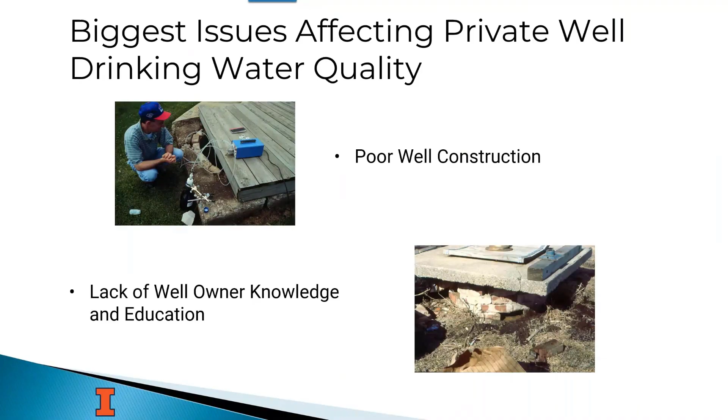Now, of course, this always comes with challenges. The definition of a private well can vary across states. The agency overseeing them and their processes, they all differ. Illinois started requiring well logs around 1978, but New York State didn't start doing that until 2000. So they only have 10 to 15% of all their logs because it simply wasn't required for people to turn those logs in. So while we go back to 1934 and earlier, New York didn't start until 2000. So that's a big difference between the two states.

Then we look at New Jersey. New Jersey has had the Private Well Testing Act. So for about 20 years, they've required that wells be tested during a property transfer. They don't share the individual results with anyone but the buyer and sellers, but they do use a 2 by 2 grid to group homes, and this helps protect home values by not singling out which home had high levels of a contaminant.

Then you have states like Pennsylvania, where there is no construction code, and a drilling license doesn't require competency. You also have the state budgets limit what states can and cannot do. Some states provide a large budget to do private well education and outreach, while others don't have any kind of budget at all for it. And so, if you don't have those resources, how can you be proactive to research the water quality in private wells? And of course, when you get down to the county level, there's always disparities between those that can afford outreach and support and those who cannot.

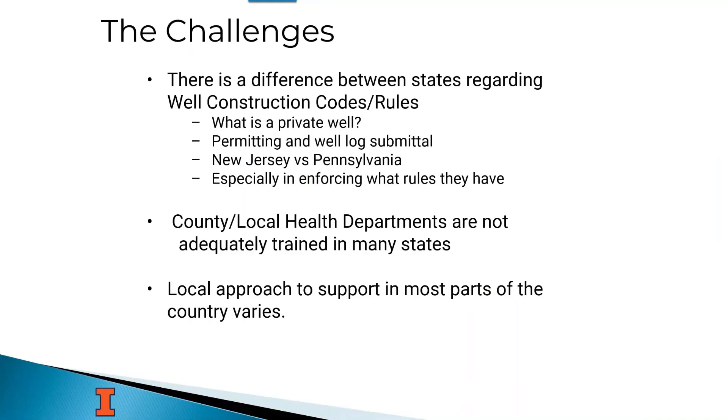I will mention Pennsylvania. They do have a license for well drillers, but if you look at their website, it does say a license does not imply that a driller has knowledge of proper drilling or well construction practice. The Pennsylvania Geological Survey does not endorse drillers based on this certification. So you do have to take that into consideration if you're going to get a well drilled in Pennsylvania.

And so some places are passing ordinances to require the National Ground Water Association certification, which is a voluntary process, in order to kind of beef up what a well driller knows to make a homeowner a little more confident in the well driller that they choose. There are only two states, Alaska and Pennsylvania, that do not have a well code. All the other states do.

But then in Massachusetts, they have 351 local health districts, which can all set their own rules. And Illinois is 5 times the size of Massachusetts, but we only have 97 certified health departments, and they all follow guidance given to them from the Illinois Department of Public Health. So as you can see, depending on where you're at in the nation, it really varies on what governs well construction codes.

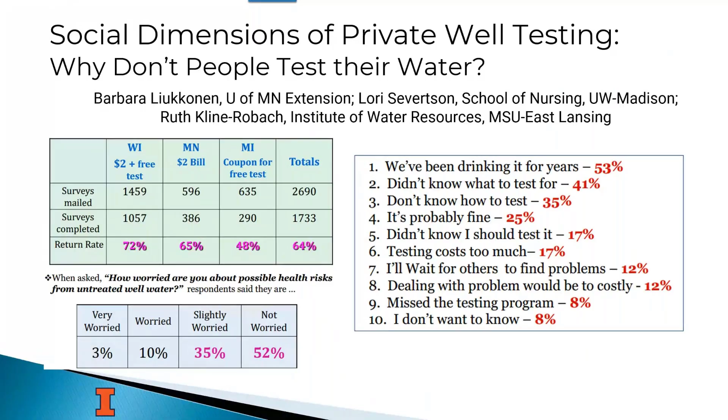And so whenever we look a little bit closer at this, we see that 35% don't know how to test. So I don't know how to do it, so I just don't do it. A quarter of them thought that, well, it's probably fine. What do I need to test for? It's going to be okay. And then one of the things that's becoming an even bigger issue is the testing costs. 17% thought that it was too much, and the prices have only gone up since this study was done.

And whenever we deal with people who are well owners and try to convince them to test their well, one of the biggest things people come back with is, we've been drinking this water for years. It's been fine, or my grandparents lived in this house and they both lived until their 90s, so there's nothing wrong with the water. It's probably fine. And then the last one, again, I don't want to know.

I know Steve worked with an individual where they were doing testing, and the guy said, you can do the testing, but don't let me know what the results are. And whenever they talked to the gentleman a little bit more, it turned out that in the state of Illinois, you have to sign off if you know something's wrong with your well before you can do a property transfer. And he wanted to honestly be able to sign off that he didn't know that anything was wrong with his well.

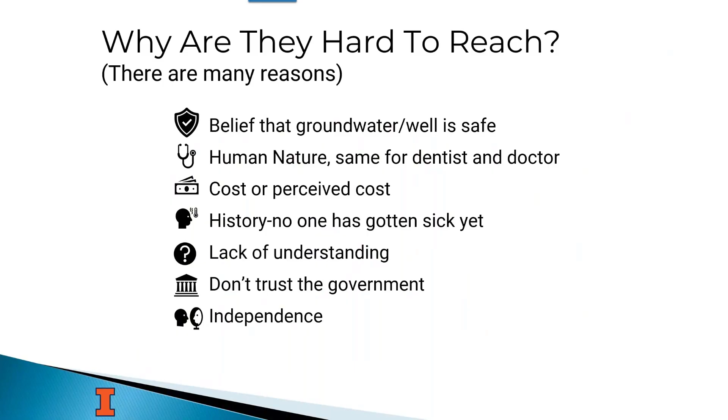Now we'll move on and talk a little bit more about the geology and the types of water wells. So whenever we have a water well, you have to get the well water from somewhere. And so typically it goes into an aquifer. But depending on what kind of aquifer you have available, that's what determines what type of well gets drilled on your property. So a dug and bored well are usually less than 50 feet and 3 feet in diameter.

Drilled and driven wells usually go into sand and gravel aquifers, and those are the ones that require a screen. Sand and gravel aquifers have a porosity of around 30%. So if you have 100 feet of sand, you'd have 30 feet of water. So they're very prolific and provide a lot of water for a homeowner. A drilled well can also be in bedrock, and bedrock wells rely on the cracks and fissures in the rock that allow the water to flow into the casing. That's why they're not cased all the way to the bottom like a sand and gravel well.

And then you may have two choices or three choices, multiple choices depending on where you live. Some of these aquifers lay on top of one another. So, here in Champaign, we actually have that very thing. We have the Glasford Aquifer and the Mahomet Aquifer on top of each other. But you can also go much deeper down and put a well in bedrock, but that's very expensive. The water quality is not that much better. So typically people stay in one of the top two, the Glasford or the Mahomet aquifers.

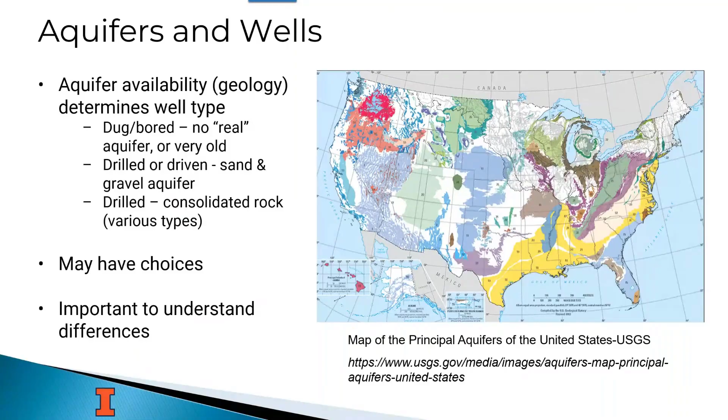They're not sealed at the edges, and so then the water seeps in from the water table and thin sand lenses, and that's how the water fills that. And so that's why you need that wide diameter, is you have to have enough volume to be able to store water as it trickles in to make sure that there's enough for the home to operate on.

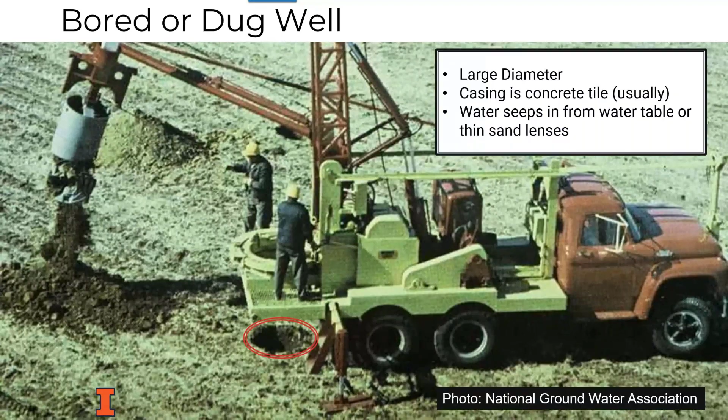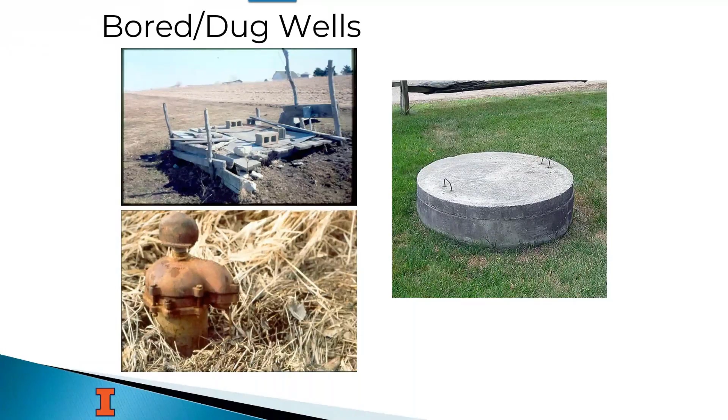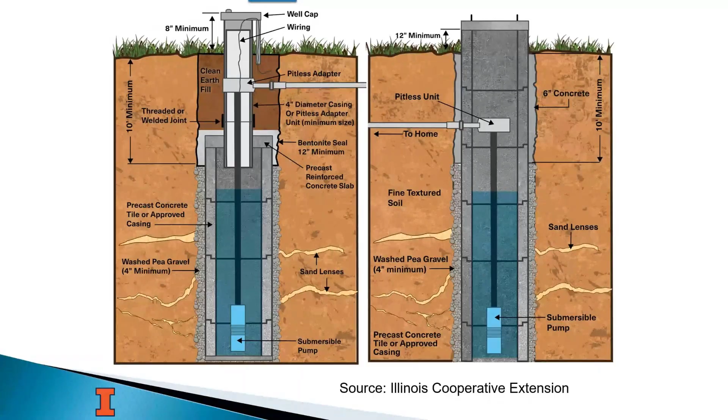Next up, we have our sand and gravel wells. A sand and gravel well will typically have a woven stainless steel screen that's pictured here on the right. And the slot size is determined by the size of the sand that the driller brings up. So in glaciated areas, the glaciers drop larger particles first, and then they drop smaller particles that fall out a little bit later. So as you drill down, you can see these stratification layers.

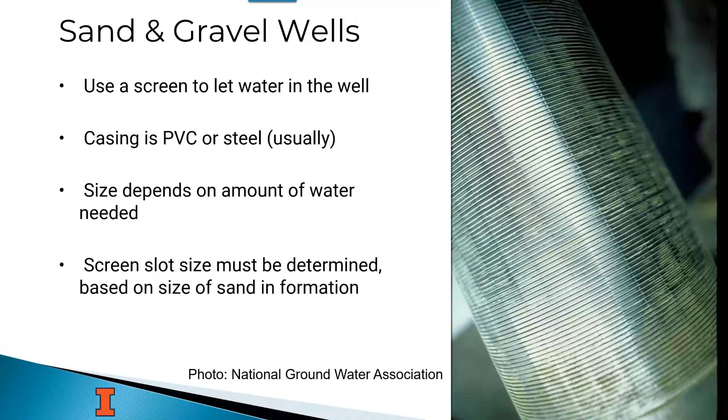So a driller, when they go down, they're going to be looking for that coarser material, so you have less likelihood of the pump sucking up that sand into the pump. So when we look at a sand and gravel well, we'll actually see that the casing goes all the way down to the bottom, except for the bottom 4 or 5 feet, which has that screen on it. And again, that screen is there to allow the water in, but keep the sand out.

So think of it just like your window screen, where it lets the air through, but it doesn't let the bugs through. And so that's why you have that screen all the way at the bottom. And then since it is cased all the way down, you do have that grout seal that goes down as far as the driller can get it. And so that way, the only place that water can enter the well is through that screen at the very bottom.

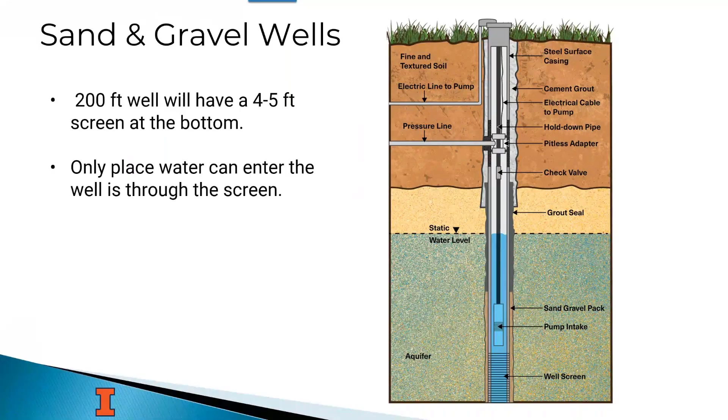Now, this is an example of an Illinois well log. And so we'll look at the bottom right-hand corner. We actually can see the geology layers. And so, as I explained earlier, whenever you do a sand and gravel well, you'll see that this driller went through a couple layers of sand before he came down to 290 to 295 feet. So that 5-foot screen was put into that sand and gravel that was a little coarser than the sand layer up above it. So this allows you to see exactly where the well was installed.

This is the same well log, it's just a different view of it, where, if you look at the very bottom left, you'll see the top of the screen was at 291 feet and the bottom of the screen was 295 feet. So this is just the same well log, just a different type of view.

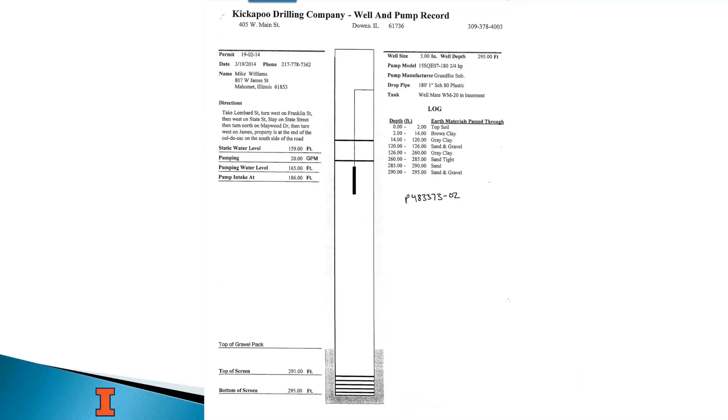So you can see exactly where that screen falls on a sand and gravel well. We also have bedrock wells. Now, these wells are a little bit different than your sand and gravel wells.

That casing only goes down 10 to 20 feet because the water comes in through the cracks and the fissures of the rock, and that's where your water is carried. So the rock itself doesn't necessarily hold water, so you have to use those cracks in the rocks, and that's where the water comes in. So you have to leave the casing open in order for it to catch as many cracks and crevices that it can to help keep the water in the well.

One thing to point out with bedrock wells is even though they can be very deep, it's those cracks that you have to worry about. It could be a crack that starts at the ground level and comes down and intersects your well 20, 30 feet down. And so you have no idea that it actually got its start from the surface. And so that can allow the influence of surface water into a bedrock well. So that is something to take into consideration if you're dealing with bedrock wells.

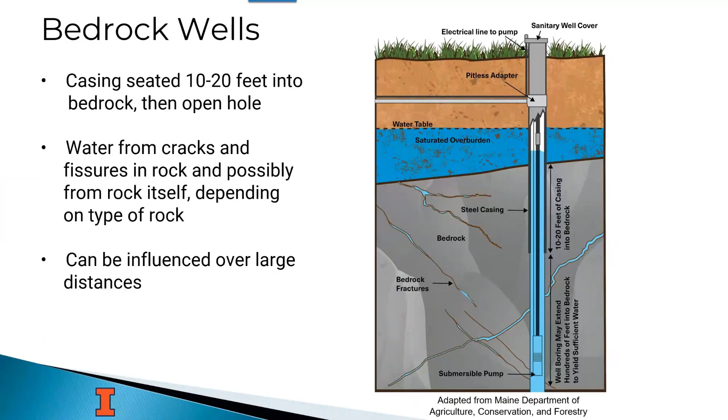Give me just a second to take a drink here.

So we know poor construction is a problem, but how do we address it? In northern climates, wells used to be placed in a pit to get it below the frost line, and there are still several that still have those pits today. And one of the main issues is that it allows rainwater to fill the pit, essentially flooding the well, which allows surface water to infiltrate the well.

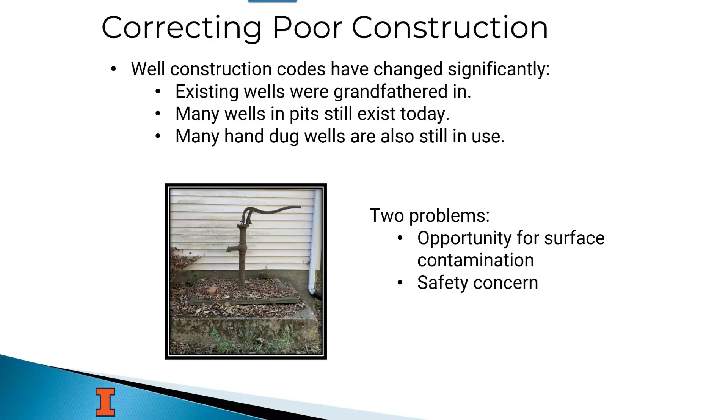And so these old wells with poor construction can also be a safety issue. If you have this large hole that's open, full of water, small children or animals or even people who aren't paying attention could easily fall into them and get hurt. So we really need to address these well construction codes, and the ones that are grandfathered in, we need to do what we can to try and get them brought up to standards to prevent these opportunities for contamination and potential safety concerns.

Here are three examples of why we need to be concerned about leaving wells open. The top left-hand corner, this is from the Washington State Department of Ecology. It was an elderly woman that lived in the house, and there was a piece of plywood that covered the well, and she stepped on the plywood and it gave way, and she actually fell into the well and passed away.

The picture on the right is taken down in southern Illinois. This gentleman was doing research on his family's farm and was walking around the area near a cemetery where some of his relatives were buried, and he came across this abandoned well, and the neighbor's goat had gotten loose and found its way and fell into the well and died. Luckily, this well was not in use at the time, but we do get the stories of people with dead animals in their well and wanting to know what to do with it.

And then the bottom picture here, this was another well in Illinois. But what strikes me about this one is you'll notice that the fence posts around it are kind of bare and worn. That's because it was in a pasture. So the cattle would come up and rub up against the sides of the well there and do their business around it. And so it's just not a safe situation at all with that one.

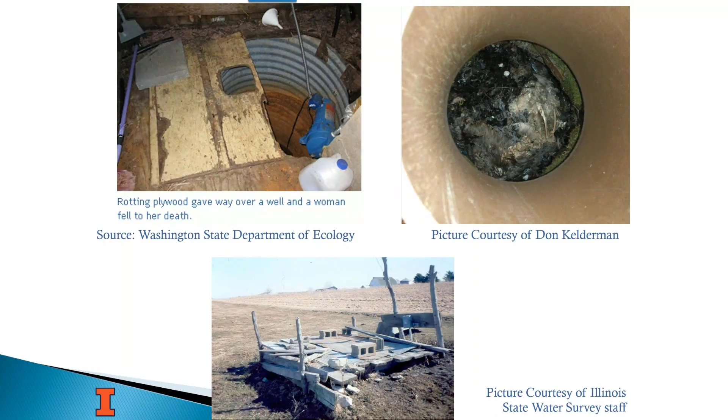What do we do with these wells? We bring them up to code. That's the only way that we can take these older wells that have been grandfathered in and get them where they're safe for people to use. In order to bring them up to code, we need to make sure that we're extending the pipe to the land surface, filling it with a clay grout, and installing pitless adapters if needed.

That's our number one article on our help center right now: what is a pitless adapter and why do I need to upgrade from a well pit? And we've had over 200,000 views on that one article, which is astounding to me.

And then if you're going to bring your older well up to code, the number one thing is you have to talk to the well authority or your county or a contractor beforehand to find out what the best approach is. Make sure that it can be safely brought up to code, or if you need a new well installed, and just make sure that you're working hand in hand with your local authorities because permits may be required, and so you want to make sure that you're talking to the professionals to make sure that you do it correctly.

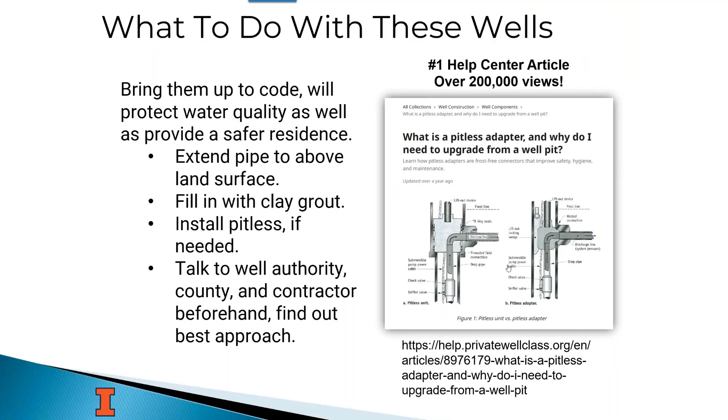And then we also have the issue of abandoned wells, those wells that no one uses anymore. Well logs weren't required until the 1960s or later, so there are so many undocumented wells. I grew up on a farm, and I know there was one woods my grandpa wouldn't let us walk through because there was an old well. And so, instead of filling it in and doing things, we just weren't allowed to go there.

The new person that owns it has filled it in, so I'm glad after all these years it's been taken care of. But if you don't know where the wells are or other people don't know where the wells are, it's a really big safety concern. Because if you have these on your property and someone gets hurt or an aquifer gets contaminated, you could be held liable for allowing this contamination to occur. And then again, it's just like well pits where it's just a safety hazard and a potential source of contamination. So they just need to be taken care of.

You can look in the news, and it is full of different examples. These are some older examples, but if you go and do a Google search for people falling in wells, it's surprising how many still occur to this day. I know it's probably been 2 years ago now that down in Taylorville, Illinois, two children fell into a well. One was trying to save the other one, and they both fell in.

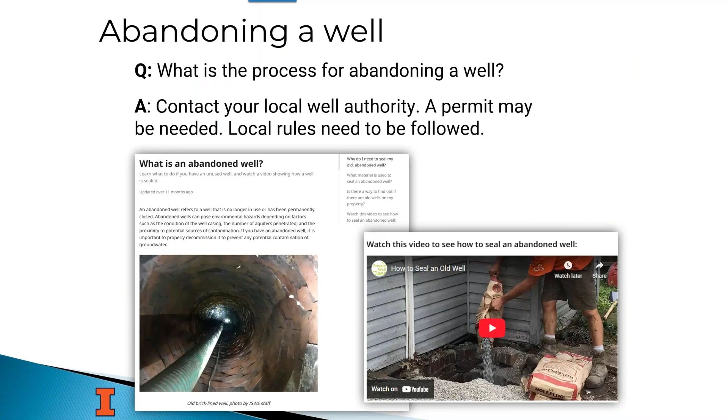We do have an article on our help center about what is an abandoned well. And if you scroll to the bottom of this article, we actually have an actual sealing of an old well. Our team was able to go out with a local well driller, and he was kind enough to walk through how this well was sealed. So if you're curious about the process and want to know how it's done, I recommend that you check out that article on our help center.

So, what are the gaps between groundwater and health? Well, number one, groundwater is very complicated. For instance, here in Champaign County, where I'm at, there are two sand and gravel aquifers, one on top of the other, like I've said before. And even though these are considered an aquifer system that works together, the two aquifers are actually quite different. So you'll get different water chemistry and quality depending on which aquifer you end up in.

Then, if you go one county over to Vermilion County, there are areas where the bedrock's only 20 feet deep, and so people have to utilize shallow wells because there's a sand seam that's only about 16 to 17 feet deep. But then you go down to southern Illinois and the glaciers didn't get down there. And so there's no sand and gravel overlay down there.

And the deep aquifers are actually very salty. And so you can't drink those. So many community water supplies have to rely solely on surface water as their drinking water because they don't have groundwater that can supply the communities.

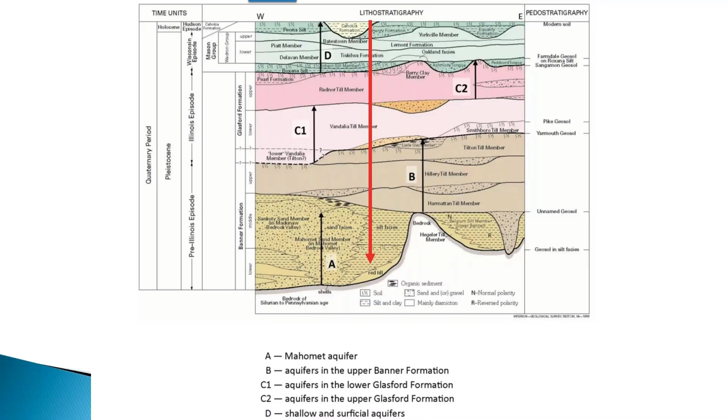So what are some of the things that you can do? Who are some of the people that you can reach out to and start forming collaborations with? You'll want to start with developing any kind of relationship with your scientific surveys, whether that's a geological survey or a water survey, any kind of groundwater related agency, the Cooperative Extension Office. All of these people have programs or have done research or have resources that they're typically more than willing to share. You just have to make those contacts and find out who to talk to, and that just helps you increase not only your knowledge, but then it increases the knowledge that a well owner could potentially get.

And so, if you don't know which of these agencies does what, you just want to look and find out who maps aquifers, who maintains the well logs, and who collects groundwater information. So you can just do a general Google search and try and find some of those answers. And so, you're just looking for these great resources that can help you with understanding geology, hydrology, well construction, and natural water quality.

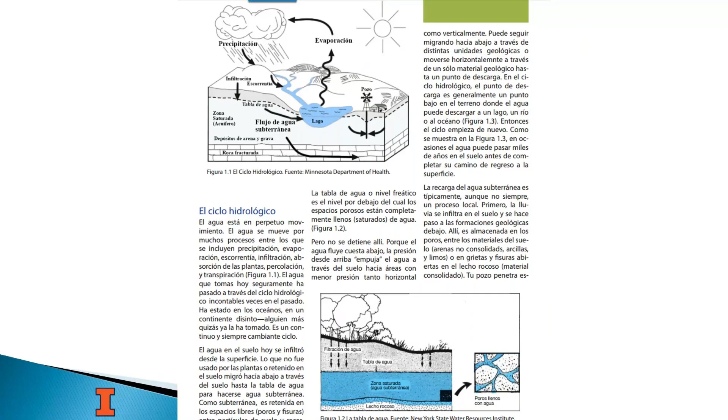For each of the lessons, we also have the supplement that goes along with it. So, for instance, if you're looking at lesson one and you're really interested in aquifers and you want to know more, you can look at the different resources that we use to build the classes and get more information on your own if you want.

We also have the series of webinars, and every webinar, including the one today, is recorded and put on our website and on our YouTube channel. And so you can go and watch these videos at your own time.

The first half is kind of the same each time, but the questions are always different. So you may want to go to that second half of the video and just see what questions people have asked to try and get some ideas on your own or see if that answers some of your questions. Keep in mind that you cannot get continuing education credit if you watch our videos online. You do have to attend the live version to be able to do that.

So we have a series of webinars that we repeat fairly regularly for well owners so they can learn. But then we have some that are given a little less frequently. So like the funding and financing, we haven't done that one since 2023 because it goes over the Farm Bill. And the Farm Bill has just been extended since 2023.

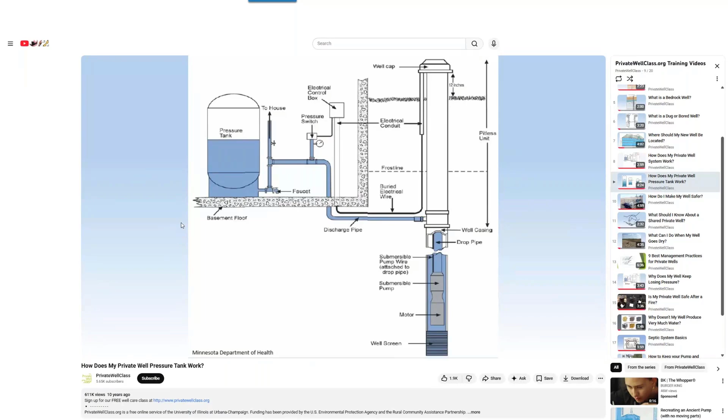We also have Tap Talk, the Drinking Water in Rural America podcast. So if you like podcasts and are looking for something, this could be a good one for you to look into. It covers a variety of drinking water systems. It's not just for private wells. So I picked out four from last season that were relevant to private wells.

So the first one is water quality investigations, which talks about biofilms in a two-part series. So while it's not all about private wells, they do touch on biofilms in private wells, so it's a good one to listen to. We also have PFAS in private wells with Jackie MacDonald Gibson and Jennifer Hoponick Redmon. So they go over PFAS. And so that's, again, another two-part series.

And then we have the Be Well Informed tool, which we discuss on other webinars. But if you want to learn about the Be Well Informed tool, it helps well owners understand their test results. So that's a good one to look at if you'd like more information on that. And then we've mentioned the Rural Community Assistance Partnership. So if you would like to know what their private well assistance looks like, Cindy Brooks joined us for a podcast for that one.

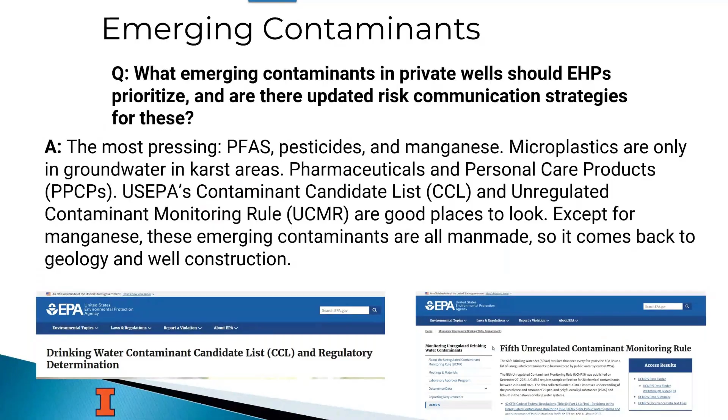So the next question is, during site evaluations, what key indicators should environmental health professionals look for that may signal elevated risk of contamination in private wells, especially in areas with shallow water tables or mixed soil conditions? So this goes back to our last slide where we ended with it depends on geology and well construction. So you're going to be looking at some of those same things whenever you're going out to look for risk of contamination. You want to look at where the well's located.

You also want to look at the age and type of the well. A very old hand dug well that's not very deep is going to be at a high risk for contamination compared to a newer well that's drilled and has been properly grouted. So you want to look at those types of things. You want to look and see, is it in a shallow aquifer? Is it in a sand and gravel aquifer? Is it a bedrock? Because the bedrock and the shallow aquifers, those are going to be at an increased risk for contamination.

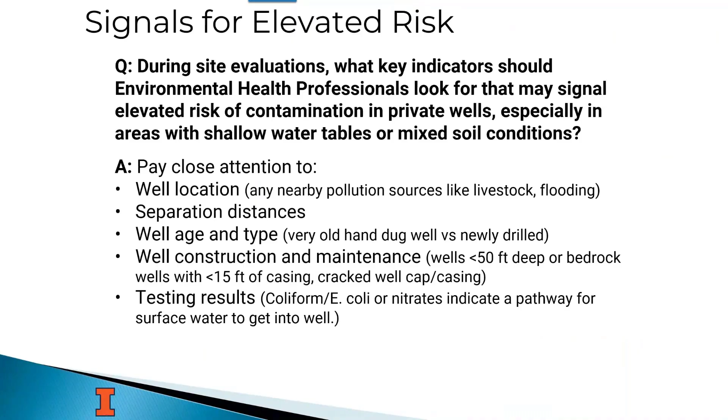So are they shallow wells in the area where the topsoil and shallow geology are all porous, like sand? Is it fractured bedrock? What's on top of this area? If this were in Champaign County, where I'm at, the wells are going to be in a deeper sand and gravel aquifer. And then there's the question of well construction, because septic discharge is not going to get into the aquifer itself because there's 80 feet of clay till above the aquifer, and the wells are solid casing all the way down to 100 feet.

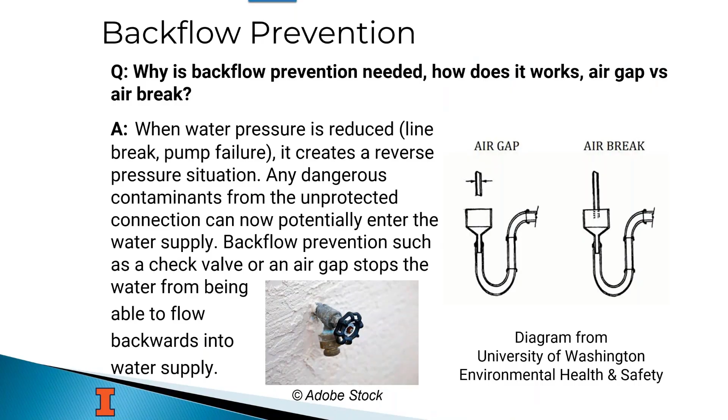So the next question is, if there's a shiny sheen on the water around the wellhead, what are the next steps? Well, the very first step is there shouldn't be water around your wellhead. So the first thing you need to make sure is that the area around your wellhead is mounded and sloping away from the wellhead to prevent standing water at the wellhead. And this is the exact reason why you want to make sure that any surface water that's contaminated isn't staying around that wellhead where it has a chance to go down.

You also want to make sure that your well cap doesn't have any damage, where surface water could get in that way. You need to think about if there's been any recent flooding that has overtaken the well, that could have potentially allowed that contamination to get down in there. And then you need to have your water tested. If you think that a gasoline product is causing the shiny sheen, you'll want to have it tested for hydrocarbons to rule that out and make sure that that's not the problem. So those would be the next steps in that situation.

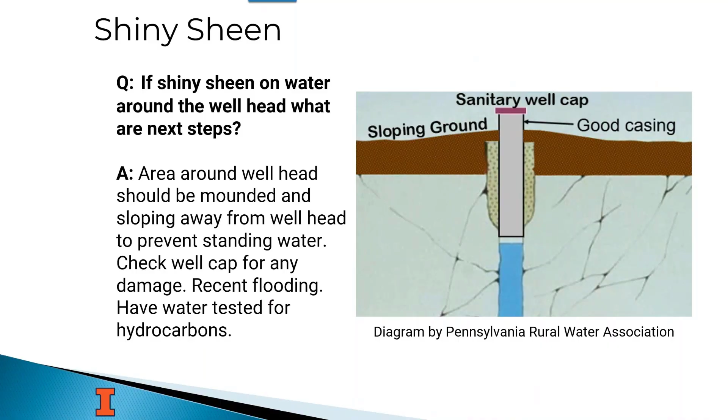Okay, and then next is how to collect a water sample from a pitless adapter. Your pitless adapter is going to be down underground, so it's not feasible to get a water sample from the pitless adapter. So what you're going to have to do is try and find a water hydrant or spigot before it goes into the house or before it goes through any of the treatment. That's how you're going to get the groundwater sample.

So you're going to want to look and see, do they have an outside hydrant or someplace that you can get it? If not, then go into wherever the water system's at, whether it's in the laundry room or in the basement, and look for any kind of spigot that's been included in the plumbing. But in some cases, you just have to go to one of the sinks to be able to get a water sample. You can't get an actual groundwater sample. So it's going to be a case by case basis. So you're just going to have to look around and see what spigots are available to figure out where to get that water from.

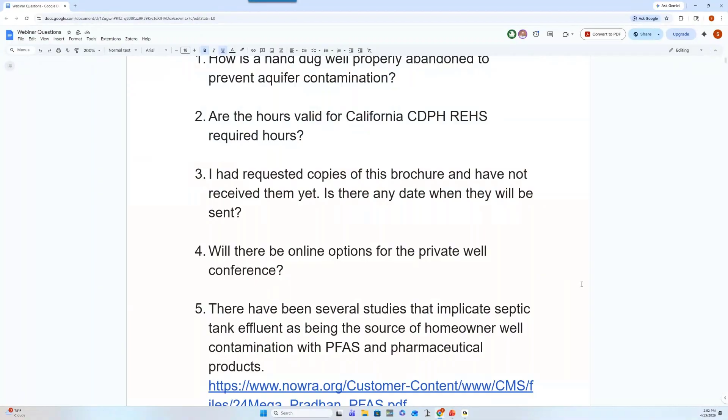But I believe we do have some. Katie's not here today, so we can't ask her. I know we have English brochures left, but I don't believe we have any Spanish currently. Okay, there you go.

And Steve, I'll let you answer number 4. Will there be online options for the private well conference? There are not online options. In the end, the folks who are really working on private well issues around the country is a pretty small group. And so it's an opportunity for all of us to get together and network, and a lot of good things have come out of that.

And so what we do for folks that can't travel is we record the entire conference. So if you want to see the conference and you can't come in person, probably by end of June, it'll be on our YouTube channel, the entire thing, every talk, every speaker. And you can go there now and see our 2017, 19, 21, 22, and 25 conferences. There's a lot of really good talks there about water and private well issues, treatment, contaminants, flooding, all those things. And they're all from people who have experience with those sorts of issues.

Especially since we work in Illinois with county health departments, many of them don't have a travel budget. And so when we have this out of state, like we are this year, it's a way that all of those folks can see the talks, even if they can't be there. Yeah.